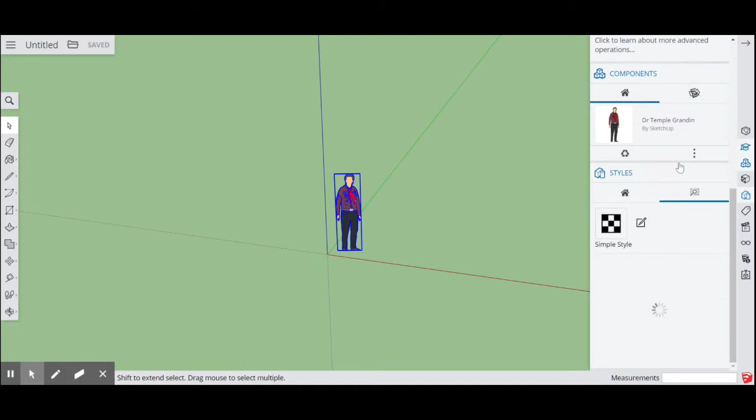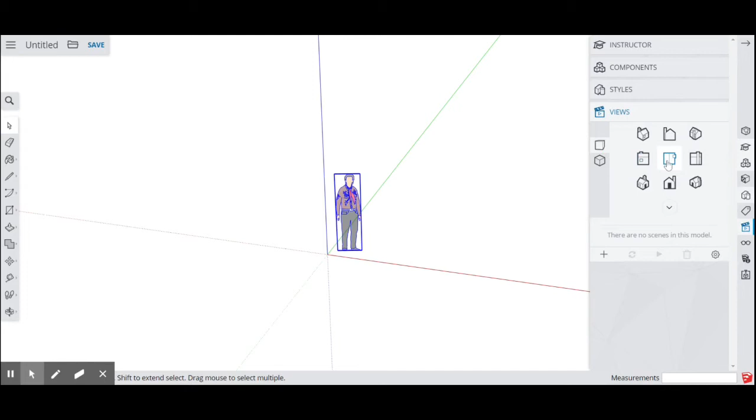And what I'm doing right now is just changing the style. So there on the right toolbar, you can click styles, and I'm changing it to, I believe it was the X-ray style. And then I'm going to change my view, go to the views button, looks like the camera action sign, change it to that flat view, and then go over to the left and change it from that big cube to that bottom cube there. I forget what that's called right now. So, yep, that middle style.

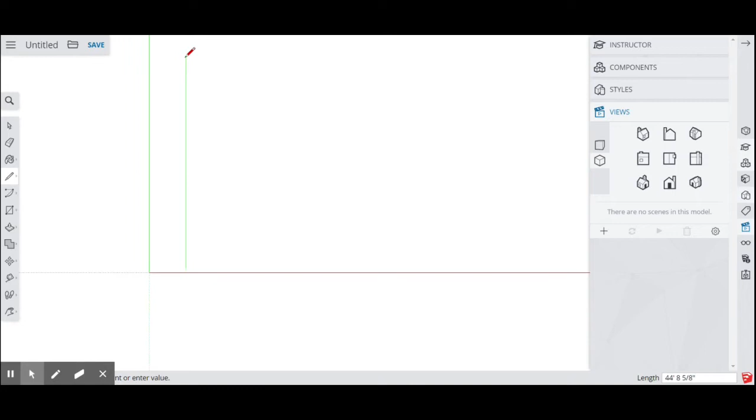I'm going to start with the line tool. Now I have the measurements of my shop on hand, so all I'm doing is just laying everything out. And when you use the line tool, you click, drag, and then you can just type in the measurement that you want it to be. So you're going to see me type in 45 feet.

Then I drag it over, maintaining that colored line because that ensures that things are staying perpendicular. And for this one, I enter a measurement. Oh no, the first one was 54 feet. This measurement here will be 49 feet. And now we're going to do the stairway in the shop. So you guys are more than familiar with this area.

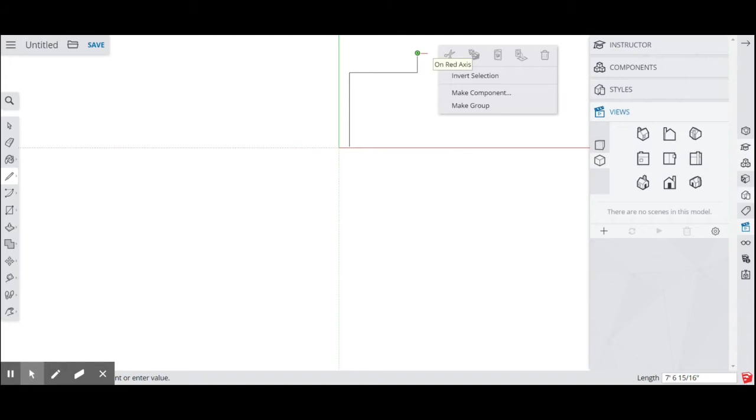And I'm going to bring that up. Oh, I forget what I ended up typing in. Now remember, when you type in your measurements, you have to put an apostrophe after the number. That indicates feet. Quotation marks will indicate inches. Now I'm going to drag it over another 5 feet.

And then I'm going to bring it down. And what I'm going to do here, instead of just going off the measurements, I'm just going to go straight down, turn off my line tool, turn it back on, and go here and go straight over. And then I'll just trim those tails off by using my select tool and then just hitting delete.

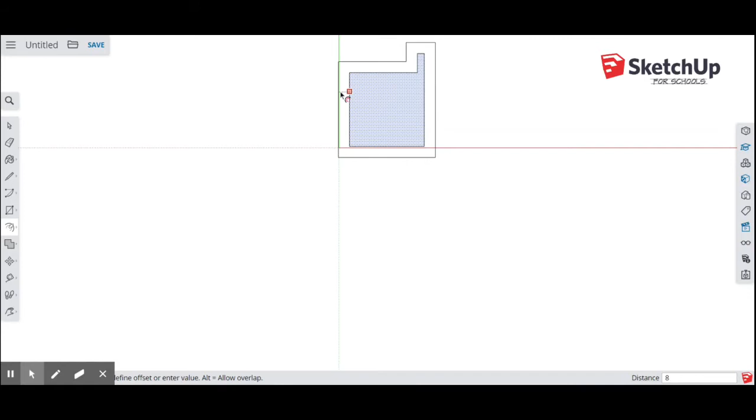So the offset tool is in that 6th button up. And what the offset tool will do is you can click that blue face and it will automatically offset that. So you can make a bigger or smaller representation. We are offsetting it 8 inches. Remember, 8 quotation marks, and that gives us our wall thickness.

Now I'm gonna go ahead and add the doorways using the tape measure tool. The tape measure tool, 3rd button up on the left sidebar, will give you the guidelines you need to draw the doorways. So what I'm doing is, if you click a line using the tape measure tool and type in a measurement, it will give you a line.

So 5 feet from the inside wall, it gave me a dotted line. These are similar to construction lines in Onshape. They aren't part of the actual design. They're just there to help us lay out. Same here. Now here you'll see I make a guide point.

So depending on if you click on a point or a line with your tape measure, that will change whether you end up with a guide point or a guide line. So these are guide points. That first guide point is 3 feet from the inside edge, and then the doorway is 3 feet wide.

That covers our man door going out to our courtyard area, our double man door going out to the parking lot, and then we just need to get our main man door at the top of our entry stairway. So I'm gonna come over here and offset this line 1 foot, and then offset 3 feet from that 1 foot offset.

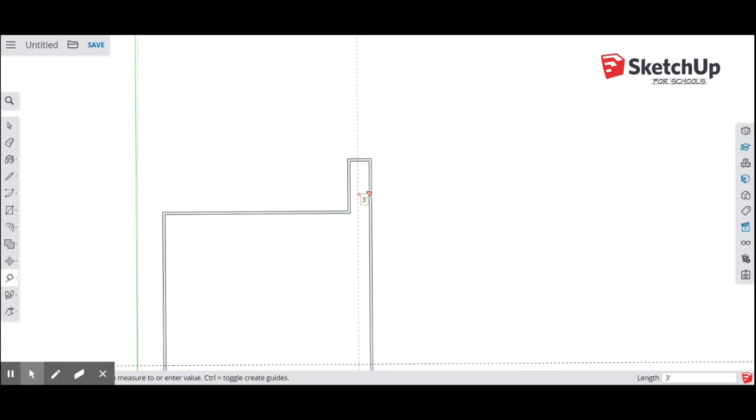Now, once I have all these guidelines, I'm gonna go back, grab my line tool, and then just snap right on top of those guidelines. And now we have those doorways cut out of our floor plan.

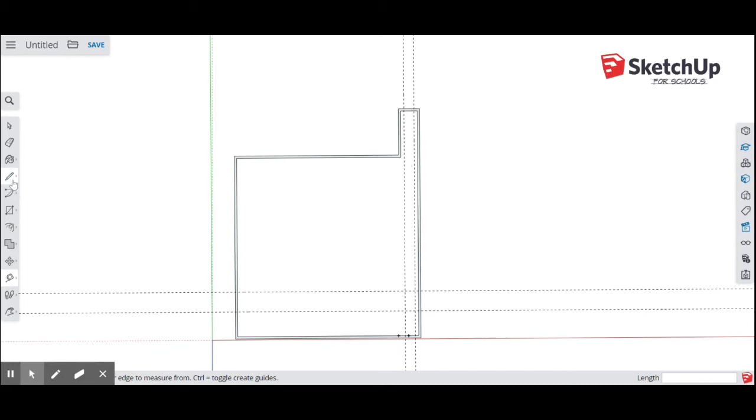Couple tips: remember to use 2 screens if you're able to. Turn on closed captions, watch it once really fast, and then go ahead and slow it down and follow along that way. It might sound like it'll take you longer to figure it all out, but it'll actually go quicker. Adjust the speed if you need to, so that you're watching it faster, slower, whatever you need.

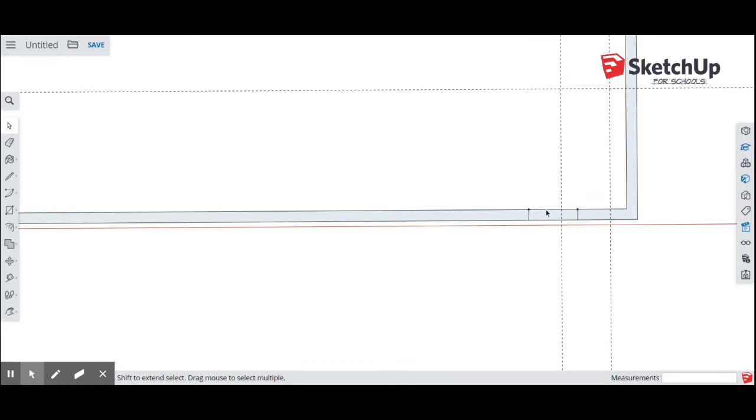All right, so now what I'm gonna do is delete these doorways. So click it, that little line should turn blue, and then just hit delete on your keyboard. And now we have all of our doorways set. So we have one more thing we're going to do today, which is add the finishing room walls. To add the finishing room walls, we're gonna do the same things we've been doing.

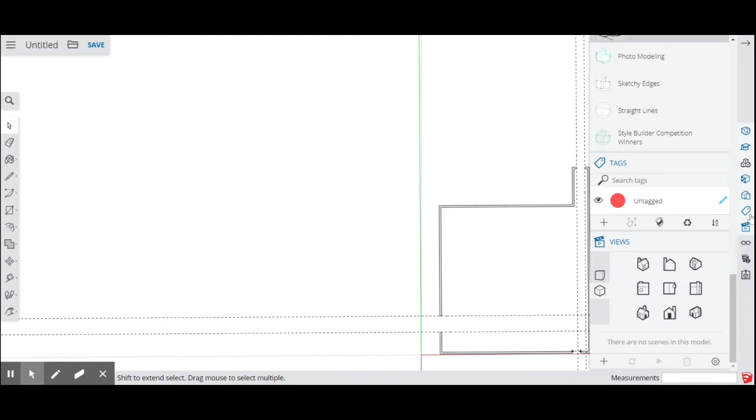What I'm doing right now though, and my muscle memory was a little weak here, is if you click the glasses on that right sidebar and click delete all guides, it deletes them all, and we're back to a clean slate. That's very helpful because once you have so many guides, they get kind of confusing, and since they're not part of the actual design, we don't need them there forever.

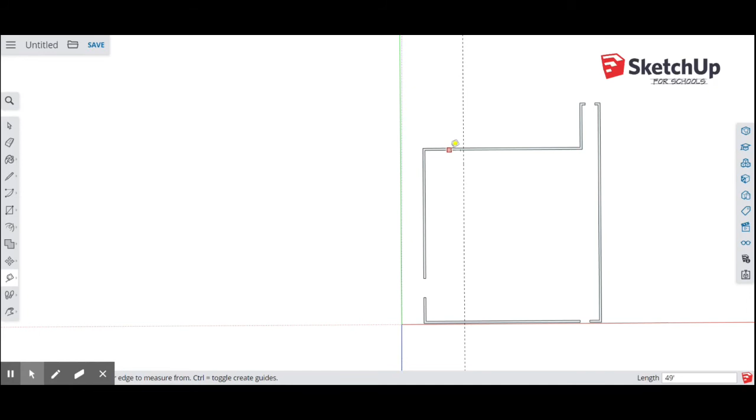So this finishing room wall is 14 feet. So from the inside of the wall, offset that 14 feet. And then this one is 9 feet. We're then gonna head over to the left sidebar and grab our offset tool. After we fill in these lines, click that face inside the finishing room, drag it out, and type in 8 quotation marks for 8 inches.

We're gonna clean up these lines here that kind of extruded into our wall spaces after we add a 3 foot wide door that is butted right up against that sidewall. Trim everything up, a little bit of repeat of what we've been practicing.

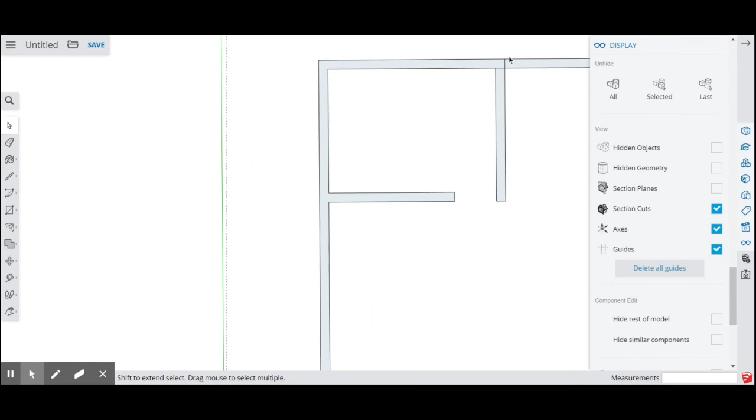If you have any issues, please timestamp where the issue is and where the confusion came from. Tell me where you got lost and what you're trying to do next, and I will troubleshoot that as best as I can for you. Remember that if you submit anything you're doing on SketchUp to me, that will give you classroom economy bonuses, as well as count for various types of credit. I'd love to see it.

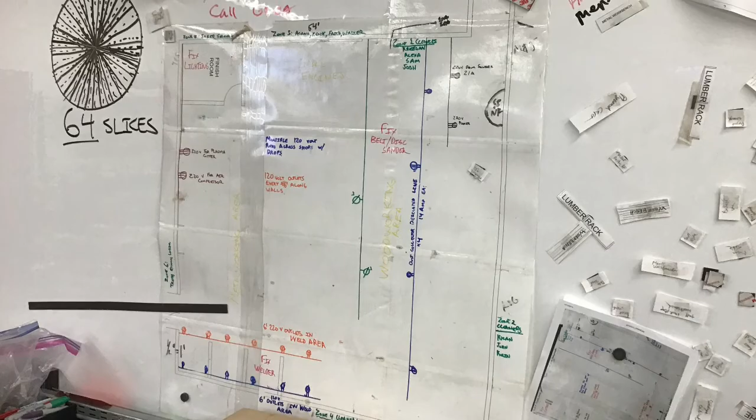It does not have to be the shop. Go ahead and try drawing up your room, your house, whatever. We will be moving on in the next video to making our shop 3D.